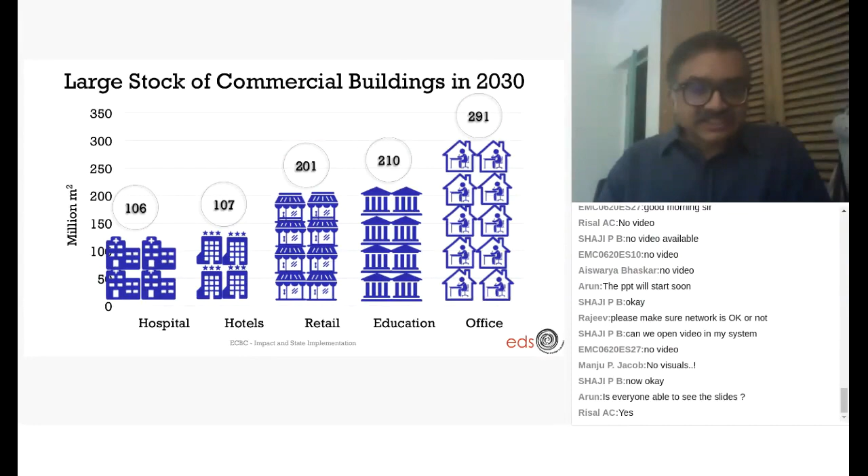So just to set the context, India is growing, and we're expecting, if you look at the next 10 years, another 1 billion square meters of commercial construction, which to a large extent is divided in offices, educational buildings, retail, hospitality and hotels and hospitals. These are some of the fastest growing commercial buildings in the country right now. And if you look at the residential sector, residential is growing even faster. Overall in the country, we're expecting there's a demand for over 10 billion square meters residential by 2030. So this is the total stock that we'll have by 2030.

And if I look at it by state, Kerala is in fact about 190 odd million square meters of building stock by 2030, which is quite intense considering that there are states much larger in size but with smaller building footprints. So this was a projection that we did for ECBC impact, and it shows the priorities that the government and the states have that push the building sector and setting up of new commercial buildings. So this is just a commercial building stock.

Now, if I look at the role of this building sector, it's not just on energy consumption, but a large part of it is also contributing to the economy. The target of the Indian economy is to grow to 10 trillion by 2030 or 5 trillion by 2025. Construction is already about 8% of our GDP and is expected to grow to about 15% of the GDP. So construction is directly a major driver for the economy, for jobs, and for a lot of on-the-ground activities that drive our economy. It is becoming even more critical as we go forward.

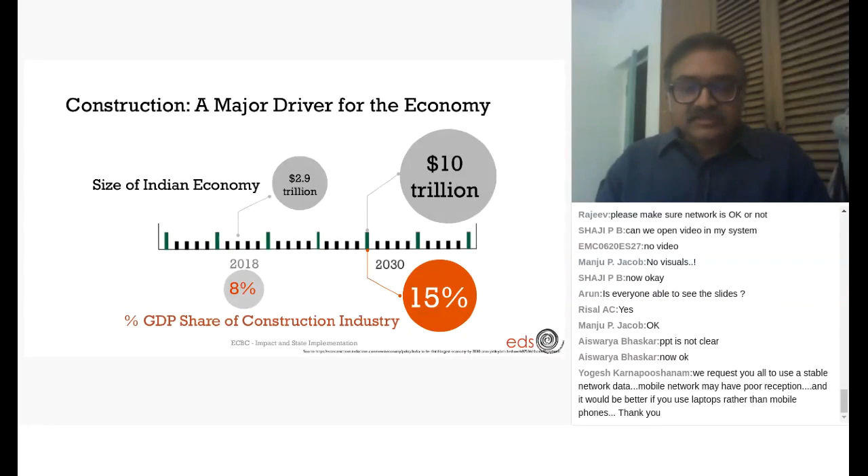We all know the environmental impact of buildings. If we look at a typical building, business as usual, there's a lot of input that goes into making a house or a building - building material, energy, water, all kinds of things.

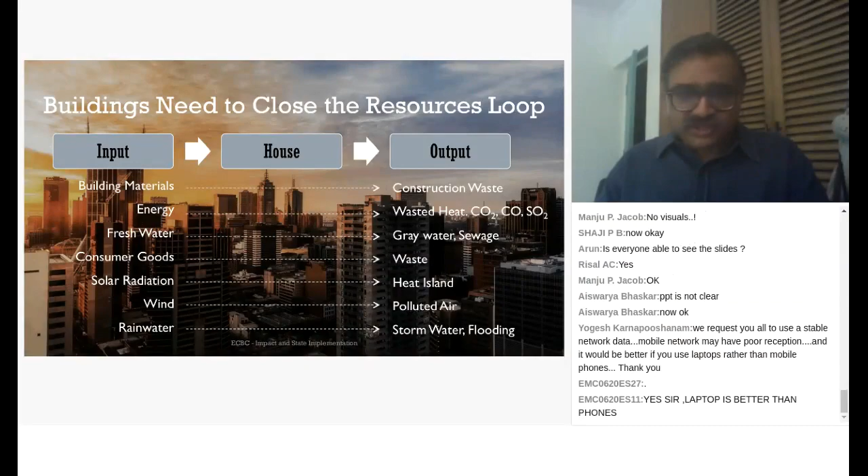But in the current system in which we operate, everything that goes in as an input comes out as a problem to be managed. Building material ends up as construction waste or demolition waste. All the energy that goes into the building comes out as wasted heat, emissions, or pollution. Fresh water goes into the building, comes out as grey water or sewage. All the consumer goods come out as waste. So the way we use our resources in construction sector, like most other sectors, is a one-way process and creates a problem at the end.

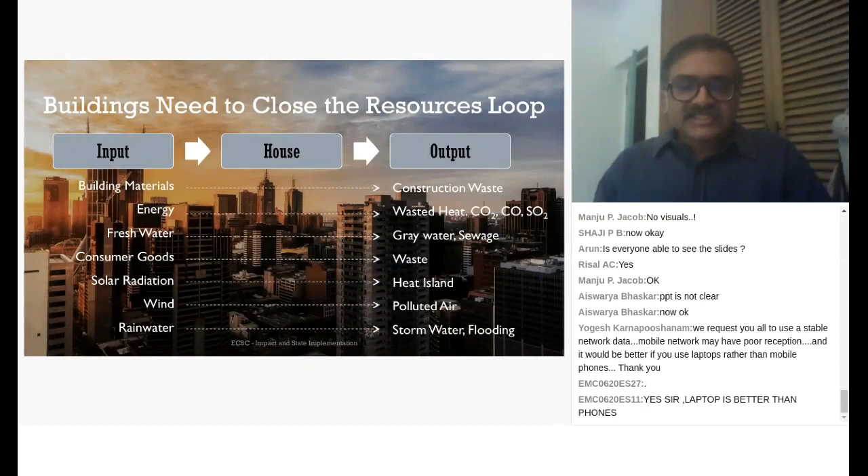What is required for us to be sustainable, to reduce the impact of our construction, is to close that loop as much as possible, and close it locally as much as possible. Buildings that are energy efficient, that are self-reliant on energy generation, have their own renewable energy source, close the loop of energy at the local level. Similarly, buildings that can have their own ecological sewage treatment system can actually reduce the effluents and sewage that go out to the city, and manage it better. So our attempt is to reduce the outflow of pollutants, of things that can cause emissions, and ECBC is one such step in that direction.

Overall, our projection for electricity use is very dire. If I look at the NITI Aayog numbers, both residential and commercial energy use is going to be our biggest energy challenge in the building sector. As we heard from the director, the biggest end use in most urbanized states and cities is going to be buildings.

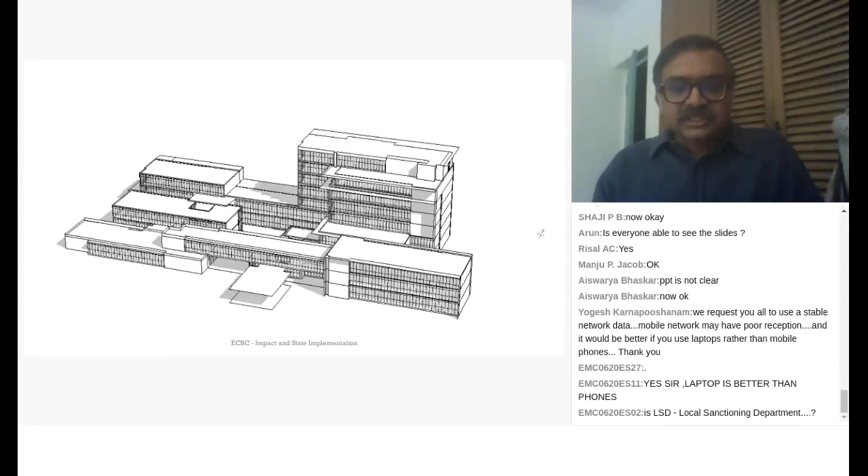It's 11 o'clock, so all of you are very proficient with understanding of what energy use and end uses are in the building. We know that a building uses energy through different processes which are required to keep the occupants comfortable. The major end uses are air conditioning, lighting, and appliances to a large extent in most of our climates.

What influences it, and what can we do to reduce this energy use, is in our control at the time we design and build the buildings, and also in the occupants' control on how they operate the building.

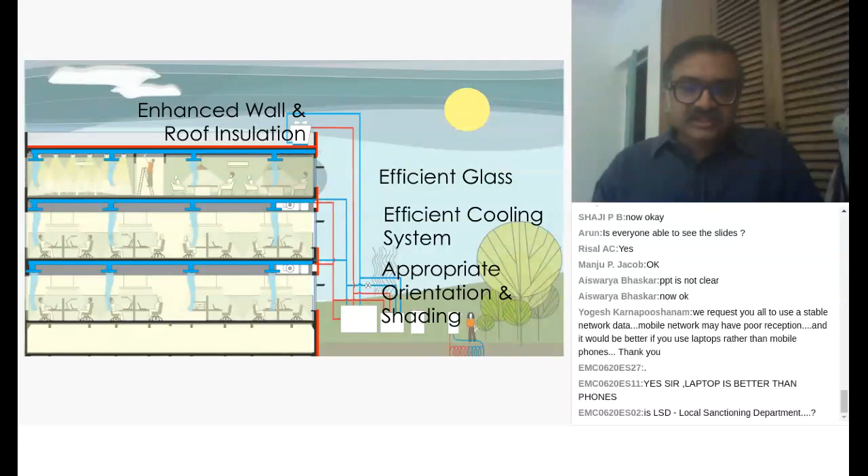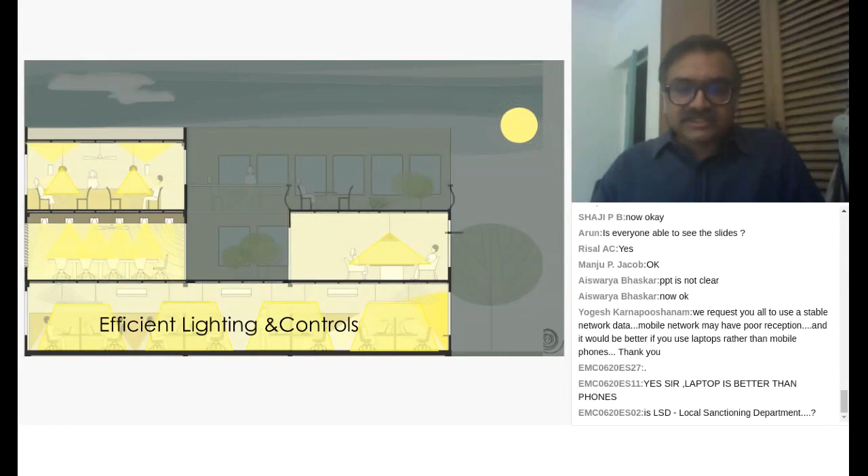We know that things like appropriate orientation and shading of the buildings, enhanced wall and roof insulation, efficient glass, efficient cooling systems, good daylighting, and efficient lighting systems with controls are some of the most cost-effective measures through which energy use in buildings can be reduced.

So the Energy Conservation Building Code is a minimum efficiency standard for commercial buildings. There's also an ECBC-R or Eco Niwas Samhita, which is for residential buildings. These two codes govern the energy use for both residential and commercial buildings and are the baseline - the minimum that every building has to comply with.

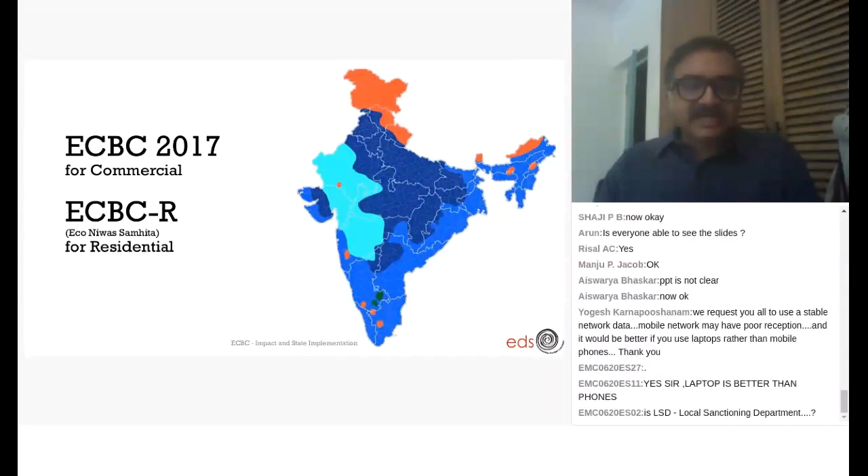The ECBC 2017, which you are going to be looking at through this course, was developed through a long and rigorous process, and it took almost 5 years to be updated. The first code for ECBC came out in 2007, and that also took roughly about 4 to 5 years to be developed.

For ECBC 2017, the process involved analyzing different aspects of building design, construction, material, and equipment for cost effectiveness, life cycle cost, and the most appropriate technology available, and based on that, it was updated through a consultative process.

The key provisions of ECBC 2017, which is the subject of this training program, are that the whole code is divided into 6 sections: scope, compliance and approach, building envelope, comfort systems and controls, lighting and controls, and electrical and renewables.

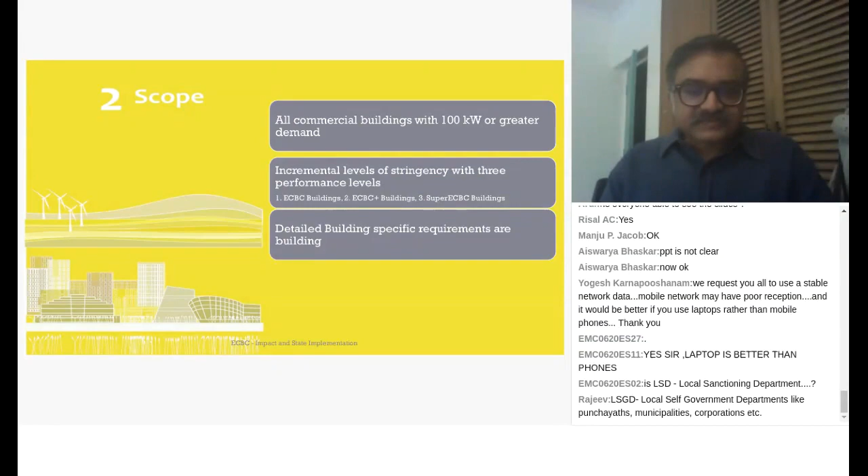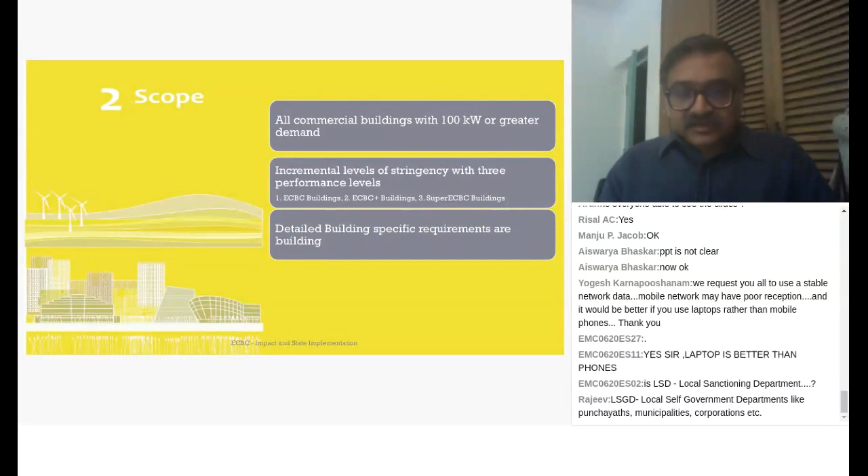The scope section deals with what kind of buildings are covered, as specified in ECBC, and every state has changed it to suit their specific requirements. Some have done it based on plot area, some on overall built-up area, and some have extended the type of buildings included.

The compliance and approach section has a few important things. One critical aspect of ECBC is that the legal definition of Energy Conservation Building Code, from the Energy Conservation Act 2001, states that ECBC will be expressed in terms of energy use intensity - energy use per square meter of building per year, kilowatt hours per square meter per year. So even when following the prescriptive norm, the code is ultimately trying to show compliance through an EPI method - energy use intensity (EUI) or energy performance index (EPI) are the metrics through which the code will be tested.

There are also distinct compliance methods for new and existing buildings, for mixed-use buildings, and this is becoming a very important situation where you find more developments where it's difficult to classify a building only as commercial, residential, hospitality, or retail. They have multiple functions, so the code gives provision for how to comply with such situations.

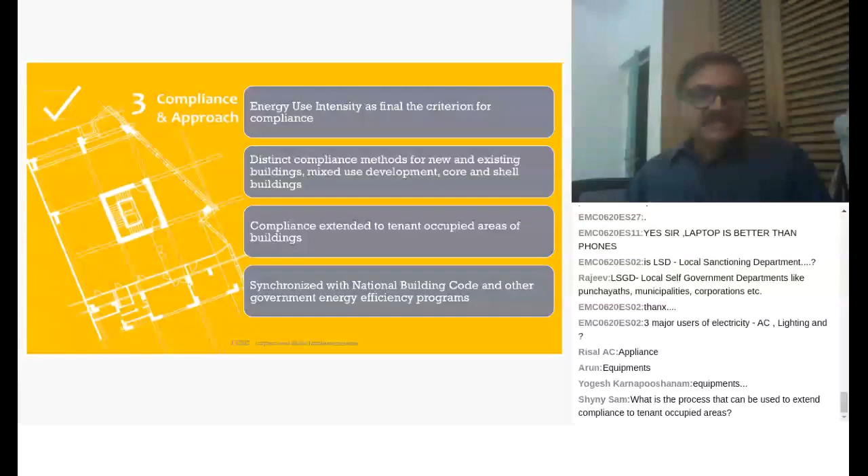This standard will only tell you the energy efficiency requirement for meeting that certain performance level. So when looking at code compliance, although it is not written in ECBC itself, you are assuming - and one should always check - that the building design standards are appropriate and as per NBC.

The next section deals with building envelope - wall, windows, roof - efficiency depends on climate and building type. There is integration of passive design measures, and in fact this is the only building code of its kind in the world that mandates daylighting. Daylighting has a direct effect on the shape and size of the building, the type of glass used, and the number of windows one has.

So I would say that understanding daylighting is extremely important for us to understand ECBC. I would also suggest that the code be understood along with some simulation for ECBC and daylighting.

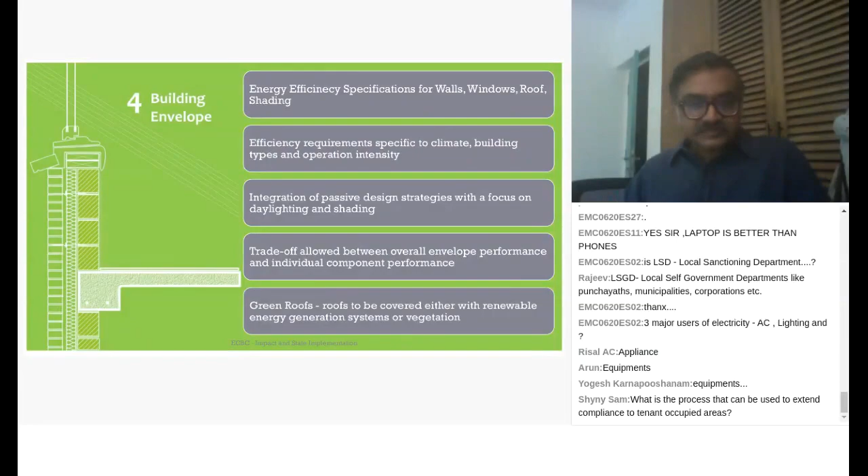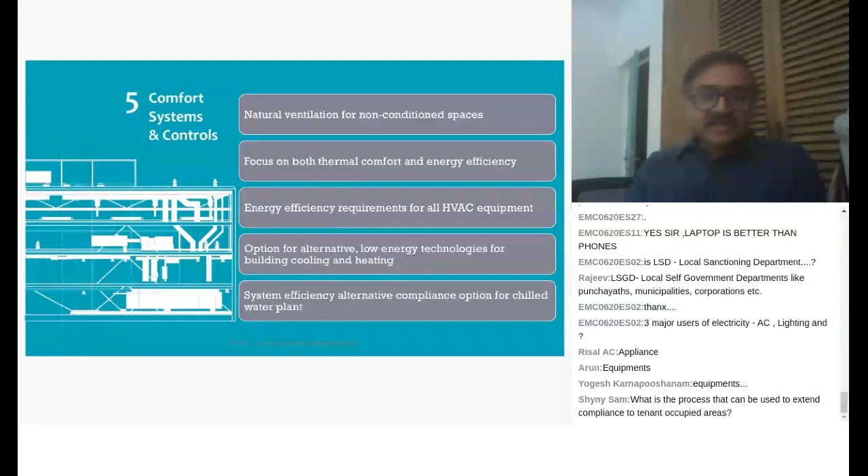Then we have the section on HVAC, which is predominantly on comfort systems and controls, where again the focus is both on natural ventilation, thermal comfort, and the code for the first time again has an alternative for system efficiency.

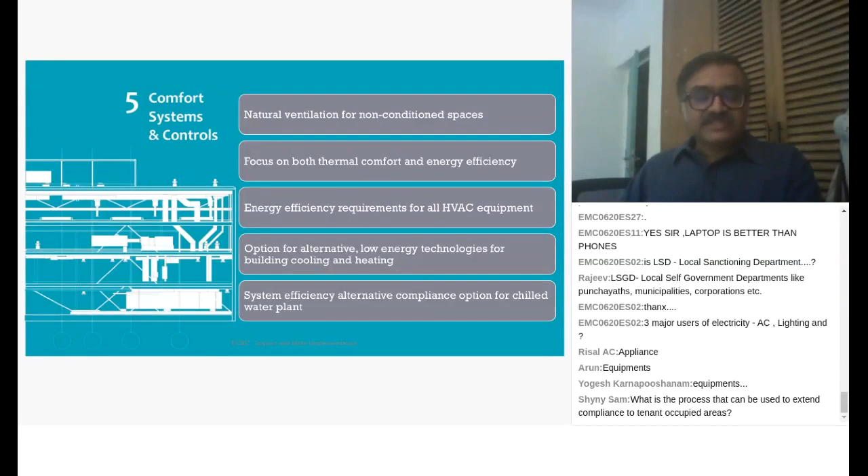So if you don't want to look at efficiency of each component, let's say in a chilled water system, you can actually, and it is the preferred way, and the future of the code will mostly be dependent on the overall efficiency of the system rather than just the components. The code gives you both the options.

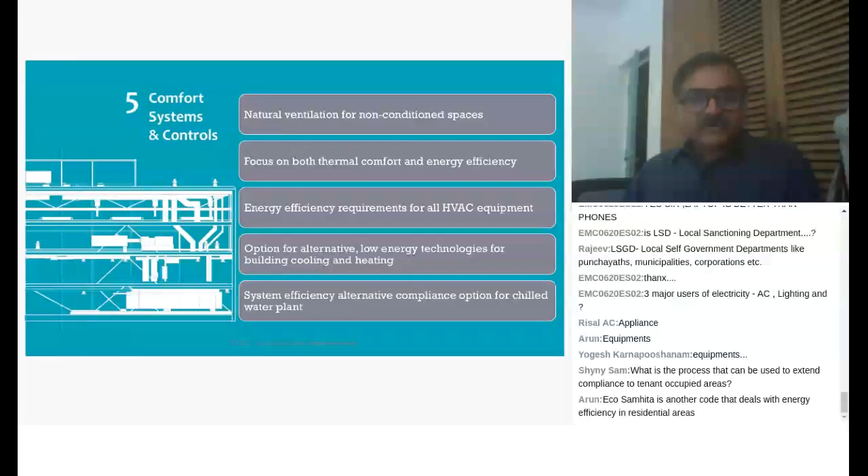Also, if you're using alternative methods of cooling that are more efficient than the conventional approaches like geothermal or solar-based cooling, or some combination of new technologies that are there, like radiant cooling, then you are exempt from some of the prescriptive requirements of the code.

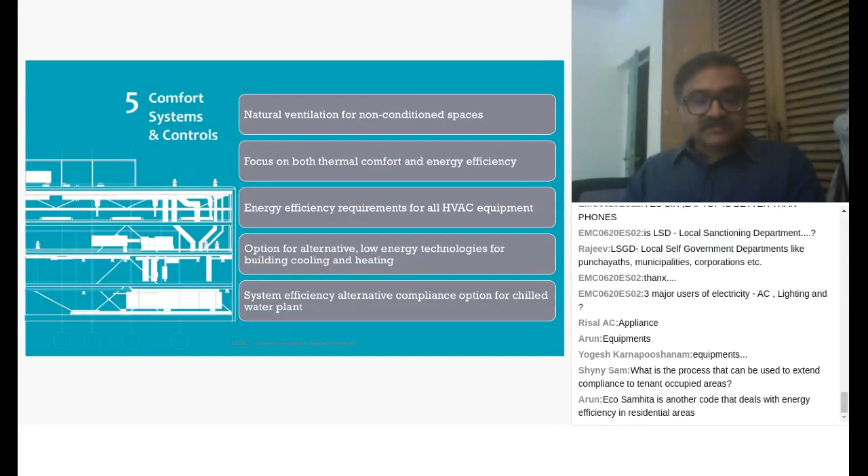On the lighting side, there's a lot of focus on not just technology, but also on controls, because efficient lighting is dependent on both how the lighting is installed and how it is operated.

On the electrical side, there's integration of renewables so that the future buildings are ready at the very minimum to get renewable energy integrated. And at the same time, we are poised to go towards net zero energy buildings.

So the potential impact of this code is immense. There's minimum compliance to ECBC, typically 25% lower energy use than a standard building which is being built today.

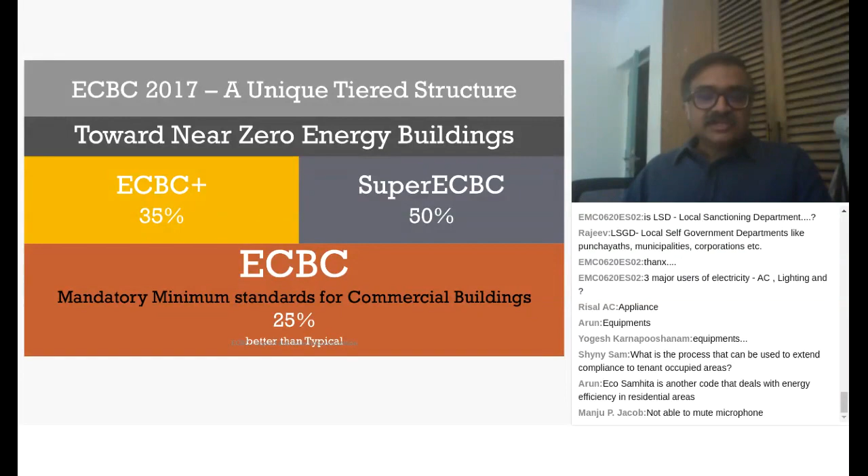One of the unique things about this code is that it has two other levels. ECBC is the minimum standard. ECBC Plus and Super ECBC are the enhanced standards, and Super ECBC is gearing towards a net zero energy building. So once you achieve a Super ECBC, that means as per current technology available globally, the building is as efficient as one can make, and the rest of the energy can actually be met through renewable energy source to go towards net zero.

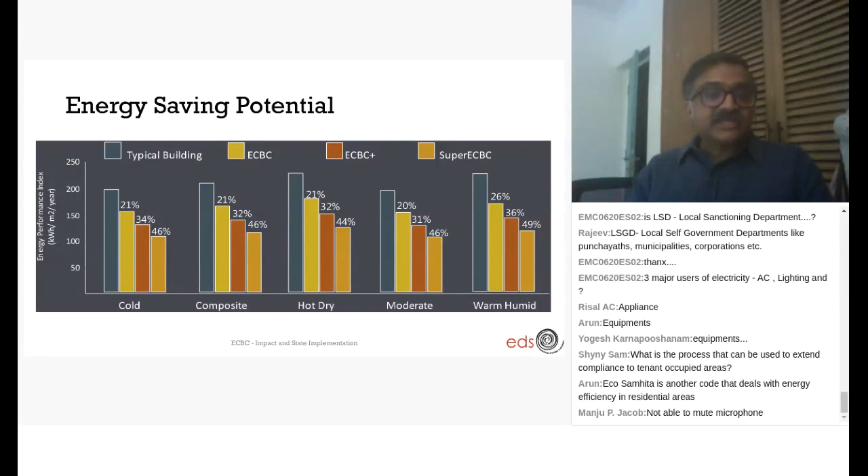In a typical building, ECBC and Super ECBC by different climates, you can see that the percentage energy saving varies, and in climate of warm and humid, where most of Kerala would fall, you are looking at 26%, 36%, and 49% savings on an average across building types, based on business as usual as of now.

Then ECBC building will typically have an EPI of 152, ECBC Plus of 130, and Super ECBC of 104. This includes all energy end uses in the building. So you clearly see there is a tremendous savings impact at the building level for the end user.

One of the key questions that we have all the time when it comes out is, what is the cost benefit of doing this? And when we did this impact assessment, we saw that a typical building by today's budget will have an increased cost between 1 to 4%, depending on what their baseline costs are.

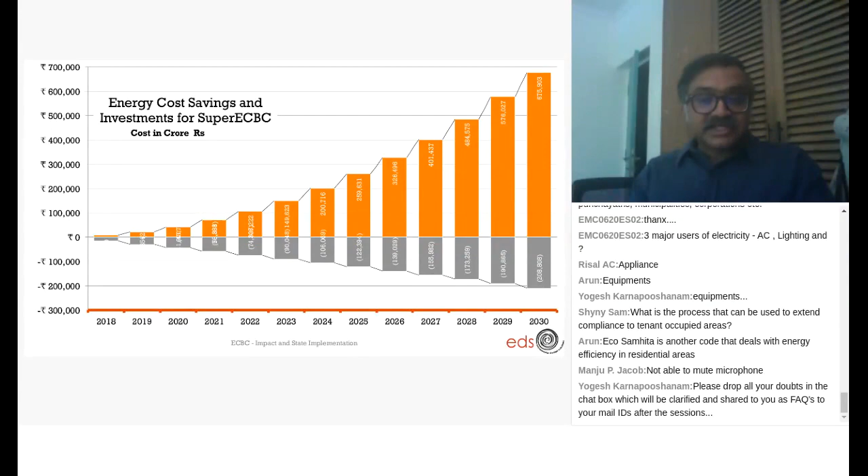So I quickly just want to, in the last few minutes, talk about what are the key issues of implementation. And we heard in the morning that ECBC has been notified and it has been now put under the municipal rules, and the local government units, LSGs, are now equipped to legally start doing the code.

So as far as we know, the state has adopted the ECBC. But the next two steps are where we are right now. So I just wanted to quickly note that there is always an understanding one needs to have, that there are three stages of completely integrating ECBC into the state bylaws. One is the adoption, where you take the ECBC, change it to the local climate conditions, and notify it. And this is the stage that we have reached right now, where the legal provision is clear.

But the next important step, and this is where most of the effort needs to go, is the compliance procedure. Once the legal procedure is clear, what is the process for compliance? If a builder, developer, owner, architect, or engineer has to submit an application for a new building, how does ECBC fit in? Where do they go to submit their application? What is the format? What information is required? What is the fee? How much time will it take? These are the compliance related issues. What tools and software are applicable? And finally, who is the right person to approve these things?

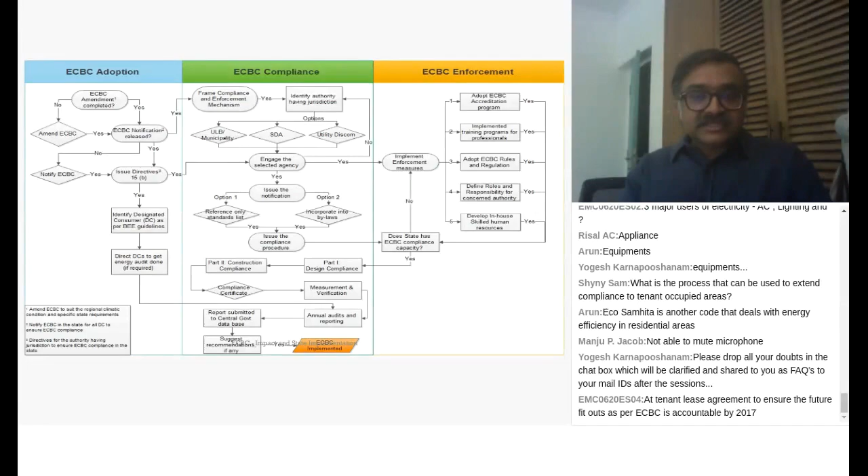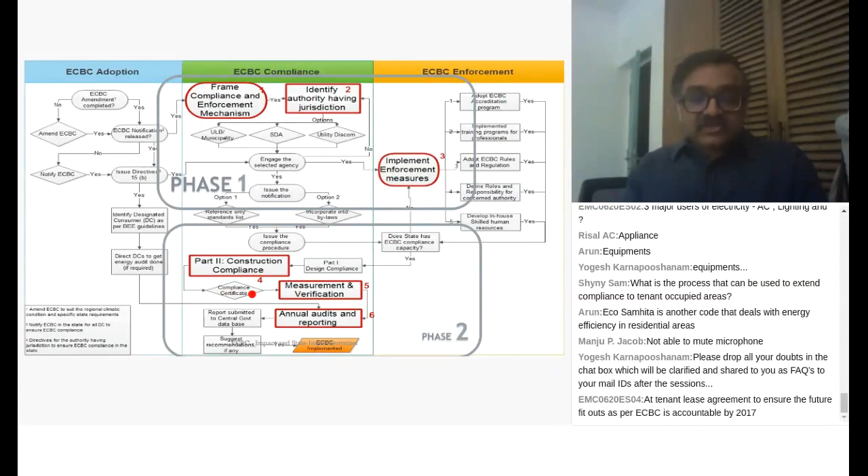So if I look at the steps in this, you don't need to get into the detail, but there are several steps of compliance. The critical steps for us are to frame the compliance mechanism and identify the jurisdiction, who does what. Then we come into compliance measurement, verification, audits, annual checks, and all kinds of things later on. So these are the 5 steps: adoption, amendment, a clear compliance enforcement mechanism, a structured implementation program with time-bound execution, and finally implementation, enforcement, measurement, and verification.

So the key barriers, we know why these things don't happen. Municipalities and agencies have to coordinate because buildings are a municipal subject and ECBC comes under a different department. They need to be coordinated both in terms of implementation and execution.

Electricity rate structures and subsidies are another issue. Sometimes in commercial buildings, the utilities are not interested in reducing their revenue by reducing energy use in buildings that are significant revenue generators, and this is always a problem in many areas. Finally, there's a lack of a government or utility champion, because this is a complex subject and somebody needs to really champion it. And of course, if the enforcement mechanism is not clear, it creates a lot of confusion and people are not really able to comply.

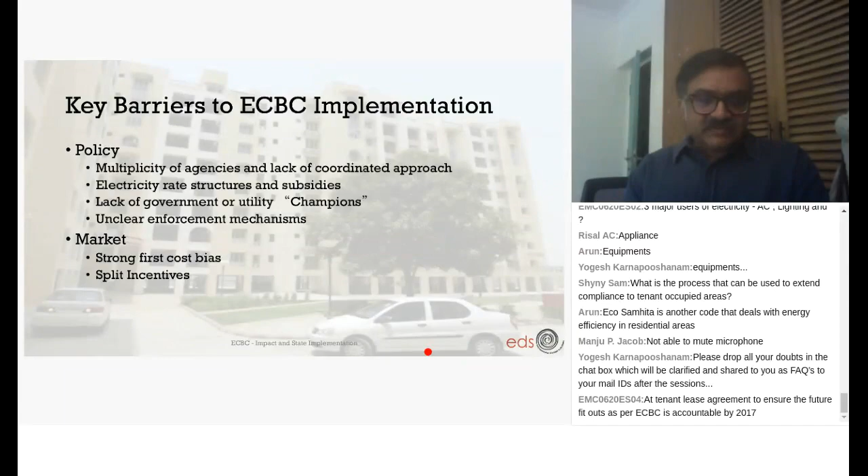Market barriers are always there. People will always do what is cheapest in first cost, even if we talk about life cycle cost. And there is a split incentive for a developer, who says, why should I do this code when all the savings will go to the occupier?

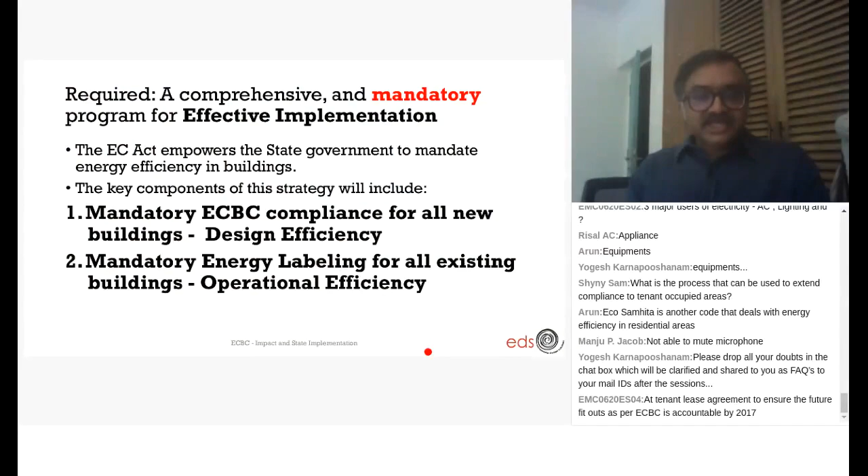So what is required is, at the state level, a mandatory program which includes ECBC for all new buildings and energy labeling for all existing buildings, so you cover both design and operational efficiency. It also means you need a comprehensive approach driven by the user's demand, the occupant's demand and their comfort. You need to look at new and existing buildings through a different lens, but both need to be covered.

It should fit within existing policies and legal mandates. We should not be creating more laws, since there's already a lot of regulation the building industry faces. It has to be market and consumer centric. As I said, decisions and investments come from the consumer, and the products and equipment come from the market, so any decision on enforcement and implementation needs to be done with them in mind. It needs to be transparent, and it also needs incentives for people who go beyond the code.

I think that for us has always been a good spot, where India has been leading in green buildings, platinum rated buildings, and 5-star rated buildings, because people really like to go beyond the minimum standards. Even in building code, that should be encouraged and incentivized.

And finally, in this era of IT and smart building compliances, a lot of this can be online, IT enabled, and hassle free. Government leadership is the key.

EMC, of course, has been pioneering this. They were part of the ECBC development, even in the 2007 and later 2017 codes, EMC had a big contribution. The state has a big contribution too.